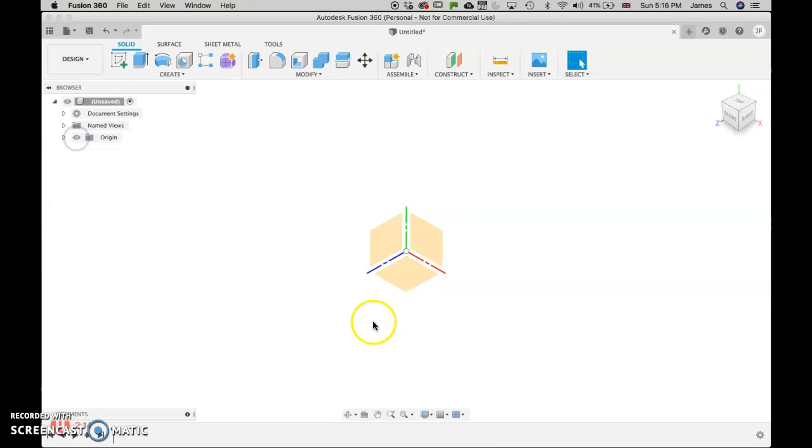So let's begin. The first thing I'm going to do is switch on the origins button here. So it's currently off because the eye is off. So if I switch it off again, come up here, switch on the eye, and that's on. And that allows us to see 3 different views. So this is the floor, as if we're looking down on an object. This is looking at one side, and this is looking at another side.

So if you think about it, if you want to look at the front, it's here. If you want to look at the right, it's here. If you want to look at the top, then there's the top here. So we're going to begin drawing on this surface. So what we're going to do is create a new sketch. And we're going to click this surface here, and it's now moved around. You can see we're looking from the top.

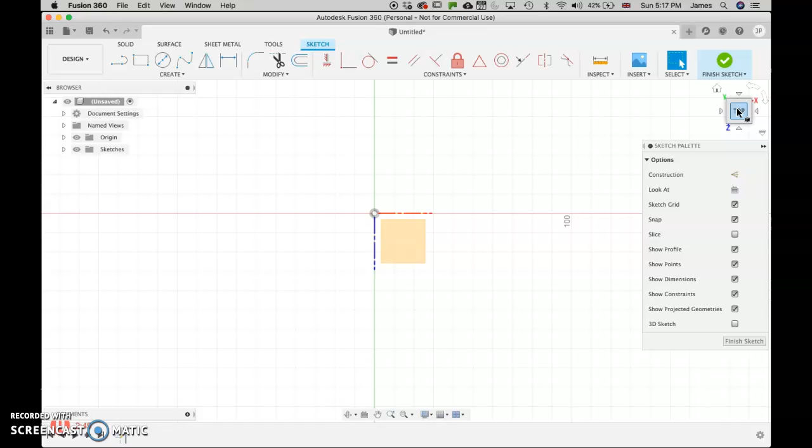I'm just going to click Finish Sketch, and I'm going to come down and right-click down here. It's not letting me right-click. Try that again. No, I can't right-click. I think maybe the screen recorder software is on top. Let's try it now. Yes, I can right-click now. Now I'm going to click Delete to get rid of that sketch because I didn't need it.

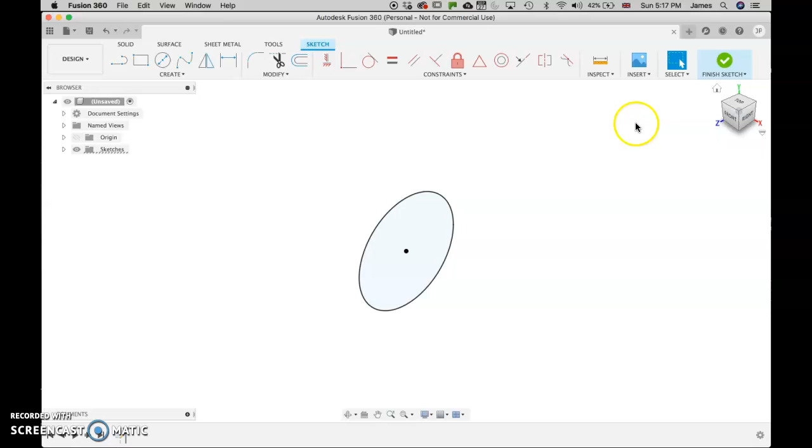So I'm going to show you what I've seen people sometimes do wrong. If their origins are off, they get a little bit lost, and they start creating, and they've clicked here, and then when they've drawn their cup, and don't worry, I'll talk you through all these steps in a second, they've accidentally drawn it on the side, like that. So the cup's laying on its side, rather than being in the direction that we want it.

So I'm just going to go back and get rid of all those by just deleting these out. So you can see how easy it is just to click at the bottom and delete out the things we don't want.

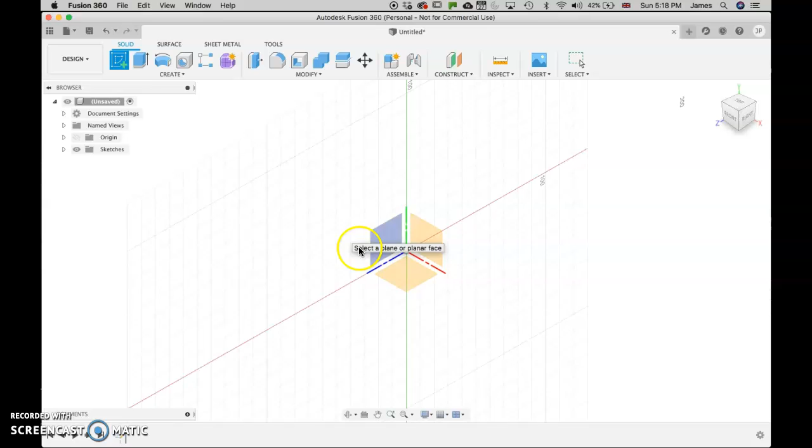So now let's start with what we do want. So what I need you to do is to click up the top here, the Create Sketch icon, and make sure you get the floor one, not either of the sides, but the floor here. So you click on the floor, and it's going to spin round, and we can check we're looking down from the top. Great.

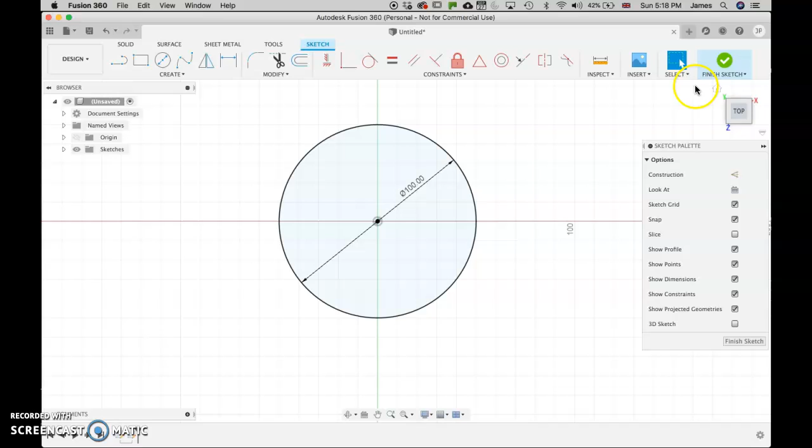Now if I want a circle, I can click here. I could even come and click here, or I could just click the C button on the keyboard, and that makes a circle for me. So I go right to the middle, it's going to snap to the middle, and I want to make this 100. So now, if I click Finish Sketch, if yours doesn't spin round, just click the home icon and that makes it spin round.

Now I want to pull that up. I want to stretch that out to make it the beginnings of the cup shape. So I could click Extrude, or I could click Press Pull, it does the same thing, or E on my keyboard and I get that extrude. So if I just show that again, cancel that, I can click here and then click on it.

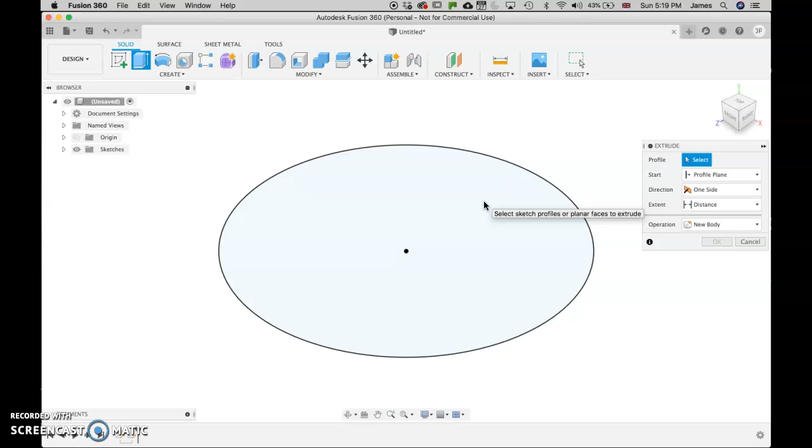I've already got it selected. If you haven't got it selected, or you've got something else selected, it might not get it automatically. If it hasn't, you just click on it and there we go. Click on it and select the area we want like that. So I can either pull up and it makes my shape, or I can type, so I'm going to type 100.

Now I'm going to come down here and I'm going to click fit. Now I can see everything. So I've got the sort of basic shape, so I can look at that from a few different views. I could look at that from underneath. Now I want to go home, so I can see it from home.

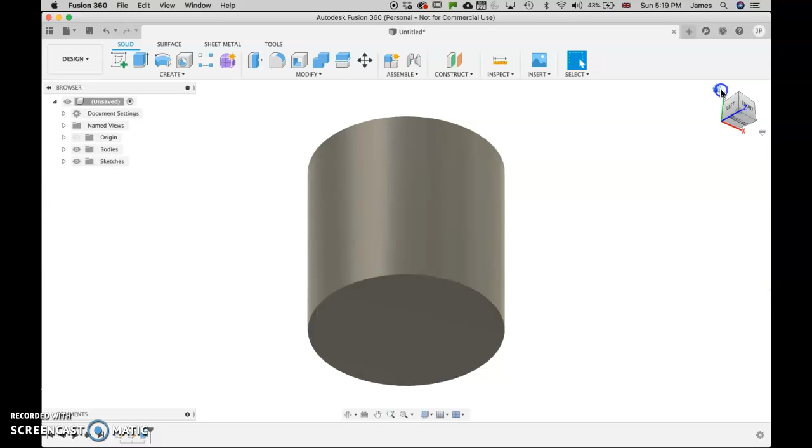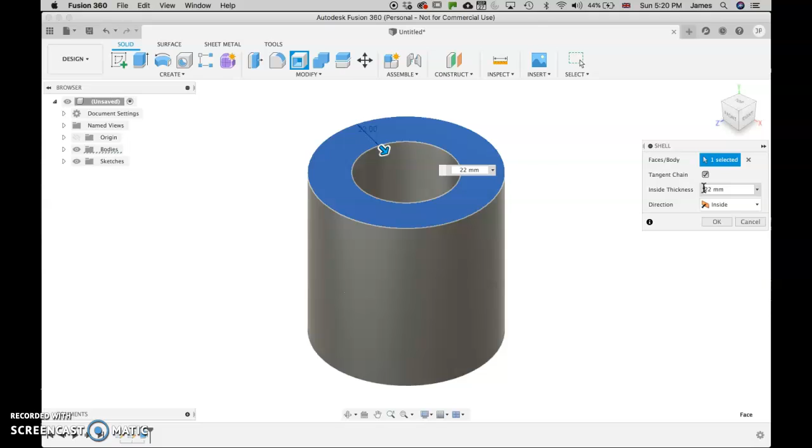Now I want to hollow this out, so I'm going to come up to modify and click on the shell icon. So I'll show you two different ways, and you can click here and you just tell it how wide you would like that wall to be. So if I change that out, there are various different sizes that could be. So I want mine to be, let's say 5, and that's now made that hollow at 5.

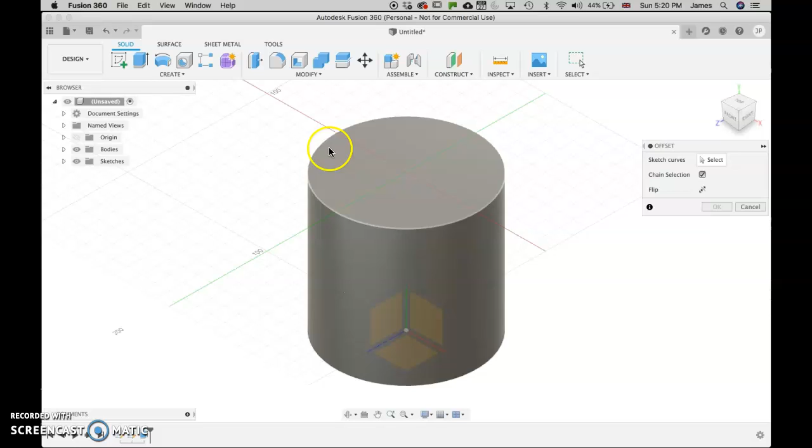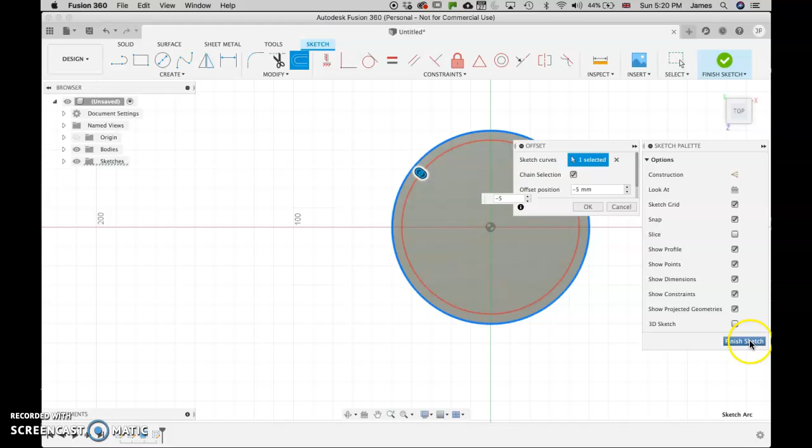I'll show you one more way of doing that. I'm just going to delete this feature. Another way of doing that is if you click O, the letter O for offset, and you click the top, then you click that edge, you can now pull in, so if I do that as 5 again, but I need to do -5 because you can see here it's made the offset go to the outside, but I want it to come to the inside, so -5.

If I click finish sketch, I can select this area or that area, and I want to get rid of this area. So E for extrude, select the area I want, and pull it down. Now with this one, unlike the last one, we can control the height we want it to be. So if we remember, we made it 100 tall, so let's come down to 95. It's not going to do that automatically, so I just need to jump in here.

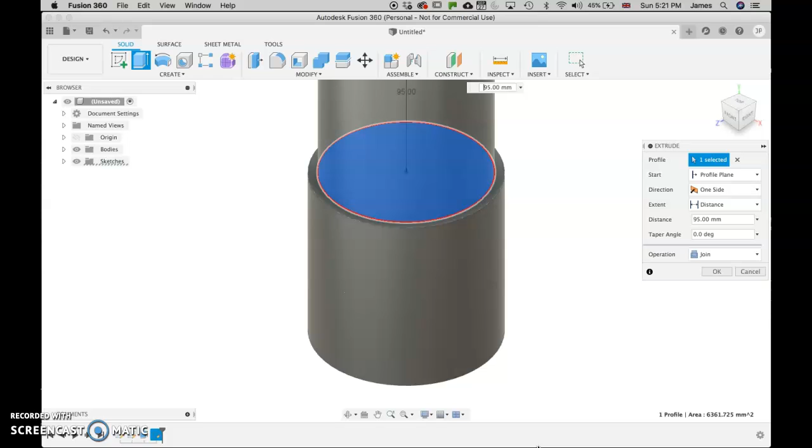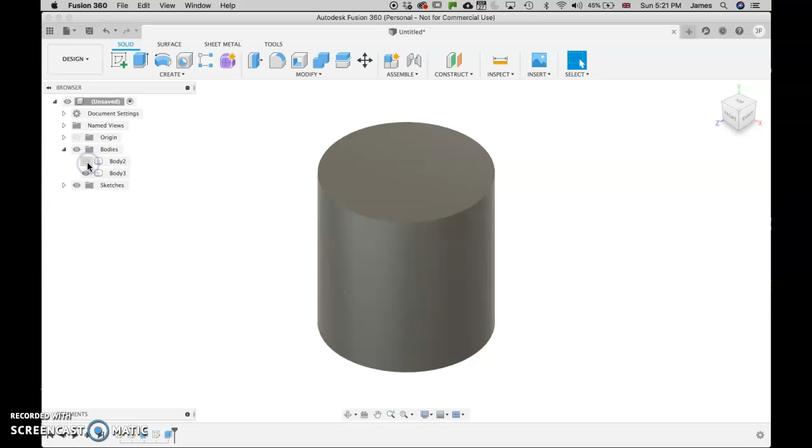And -95. If I haven't got the minus, it'll add material to the top, but I don't want it to do that. I want to do minus. So we've got -95 and a cut operation. Now I could do a new body, and that's now actually made a new part inside there. So if I just show you what we've done, if we come to bodies, let's click OK first. We've now actually got two bodies. We've got the outer one and the inner one.

So see, it's made those two different ones, but I didn't want to do that. I wanted to cut. So I can come and I can right click here, edit feature, and I can click cut. So now we've cut down into the body. So the only things left to do is I need to make the handle, and we need to make the handle the right shape and then add some materials to it.

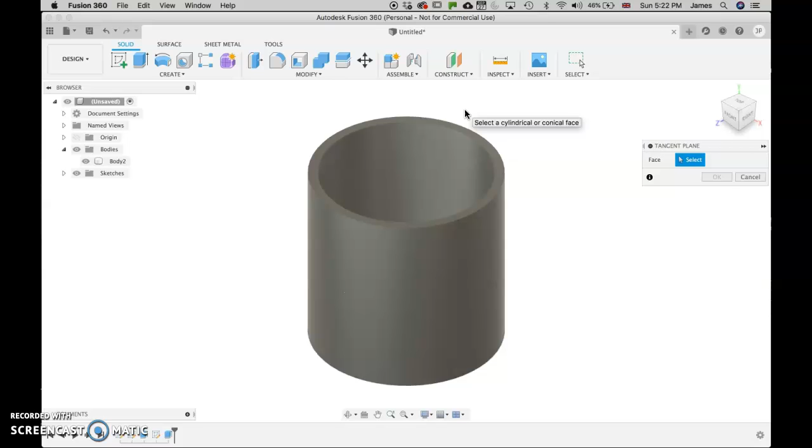So I need to come up to the top to construct and get what's called a tangent plane. Tangent just means next to. So if I switch on my origins again, I don't want any of those, they're not going to be in the right place. I want a plane around here. So I just click on the body and it's made this plane here. Beautiful. So now I add a sketch onto that plane, and I'm just going to draw a rectangle.

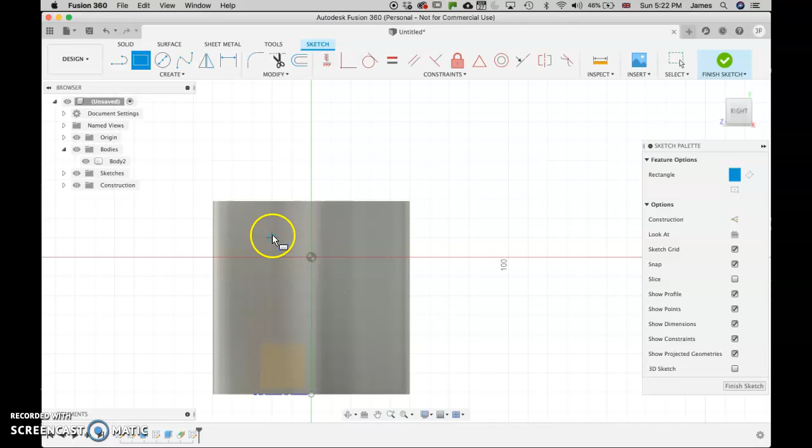It's going to be my handle. So if I draw that and click finish sketch, see we've got a rectangle here. E for extrude, and I'm going to pull that out.

How far should we go? 40, 50. We can look from the front. It's probably a bit big, isn't it? Let's make that 40, shall we? Yep, that's looking better for the handle.

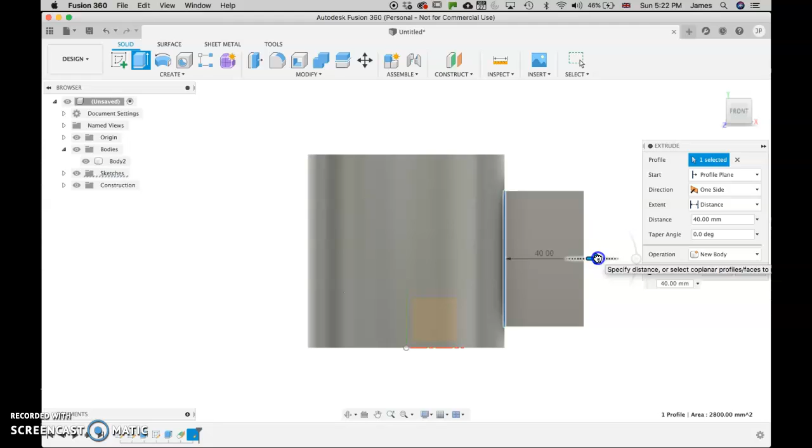I click OK. Now it's a bit of a lumpy, ugly handle there. So if I click the fillet tool, come to the top, fillet, or I could click F, either of those, I can then click that edge. If we just go to the front to see what we're doing, we can pull that down.

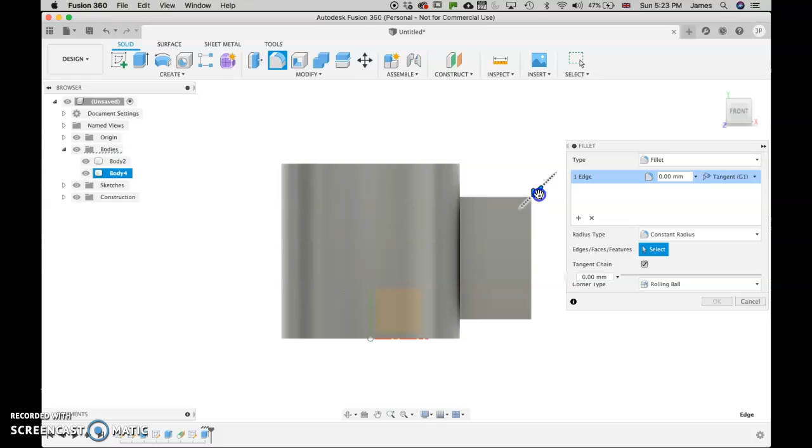We get that shape, and obviously that's not the right shape. I've exaggerated what we're doing there, so let's bring that back up. Shall we maybe go 40? Let's see if that works for us.

In fact, what I'm going to do is cancel that, and select this edge, press Shift and select the bottom edge. Click front, and we've got these two sides connected.

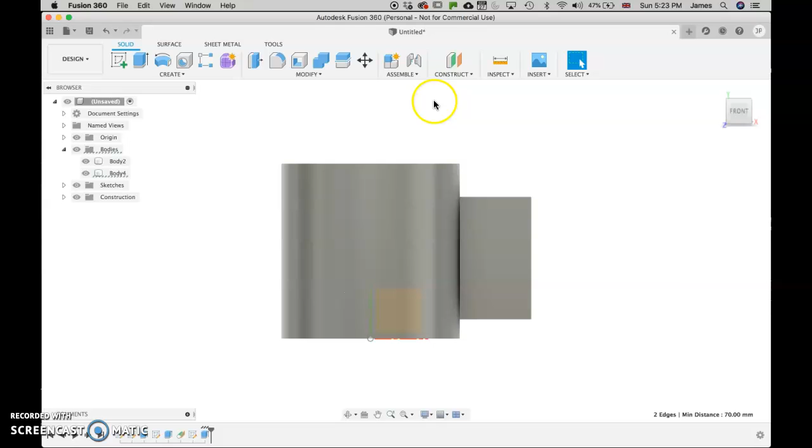So now if I click fillet, this one, I've got the bottom one selected. I just can't, yeah, I've got them both selected. So now if I do 50, sorry, it's actually clicking this button.

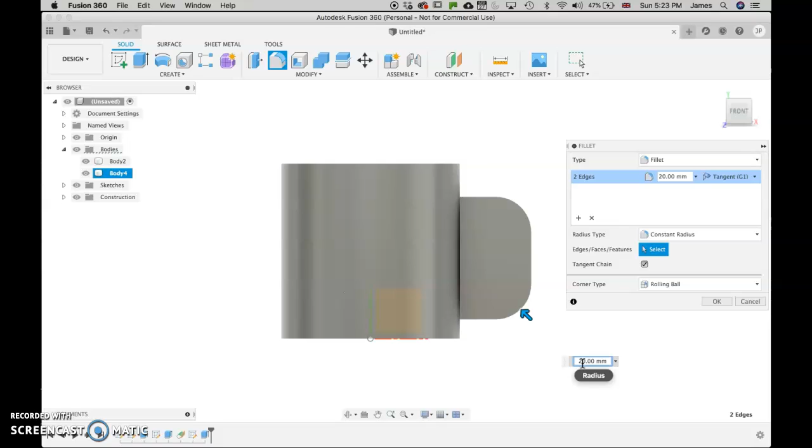So let's try 20. That's okay, but I think we can go more, can't we? More than that, yeah. So let's try 50. That was too much. 40, how does it look with 40? Too much. 30. 30 is about right, that's pretty good. So I click OK.

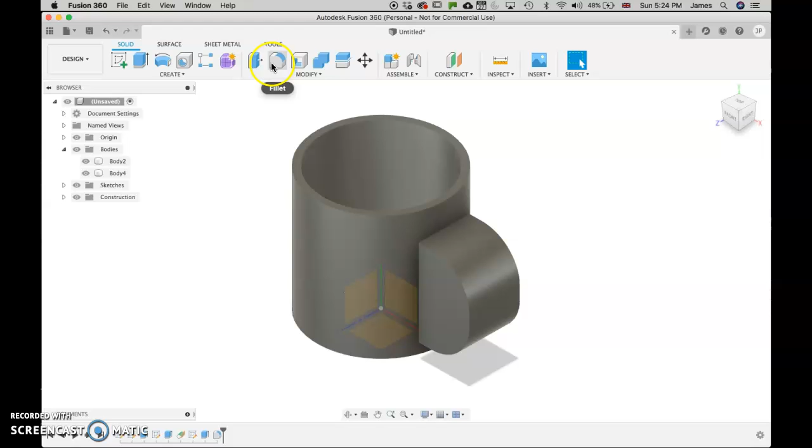So now we've got the curve of the handle, but we need to put a hole in the middle of that. So what I'm going to do is come down here, create sketch, click on this plane, and I want to make my handle in here.

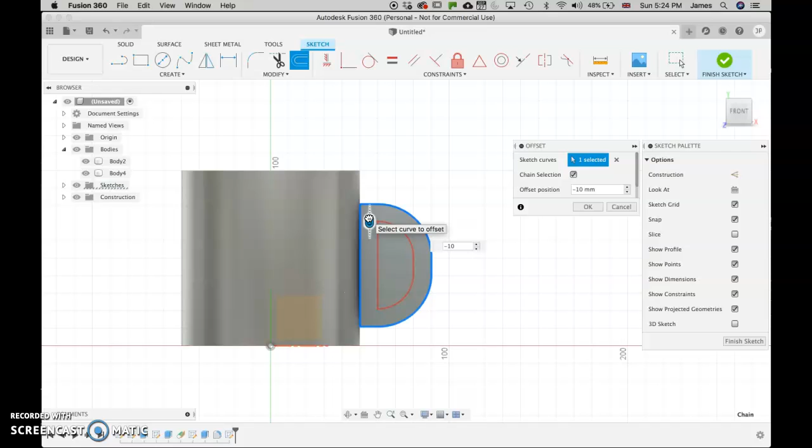So I'm going to click offset again, click on this edge, and just pull in. Let's make that, let's try 10. Minus 10. There should have been to come inside. Yeah, minus 10, that's not bad. Let's click OK, finish sketch.

So now we've got a drawing here. You might be ahead of me. E for extrude. Get this. Pull through. So we've cut through.

Now we're getting close to the cup, aren't we? That's looking pretty good. But I want to round these edges up. So you might remember F, fillet. Get this edge, get this edge. And then just try out some numbers.

Let's try 20. It's telling me 20 is too much. Let's try 10. Yes, and we're getting that kind of curve coming on already.

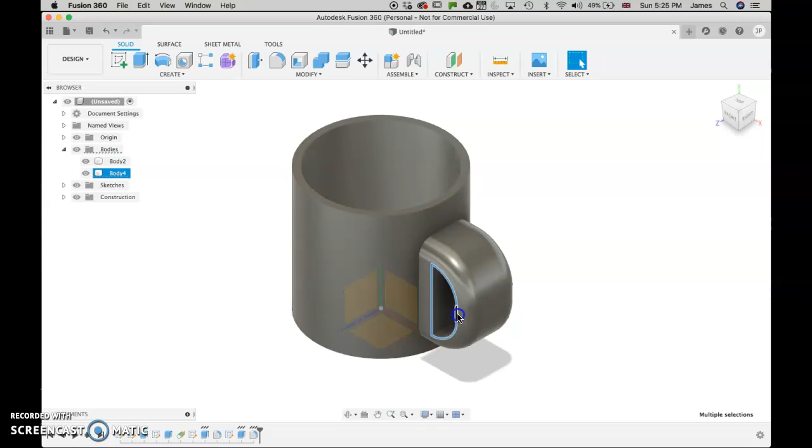Looks pretty good. So now let's come and get that one, and select these bits here. Did it get that bit? Get that bit here. Maybe try 5.

So you can see it's cut into there. So that was too much. Let's try 2. Yeah, 2's worked better there.

2's been acceptable. I can spin round by clicking on the other side of the view cube, and I can click these. I think we can remember that 2. So fillet 2.

So it's not liking this for some reason. I'm not sure why. Let's click cancel. Let's solve that. I think it's because I didn't get all of them, maybe.

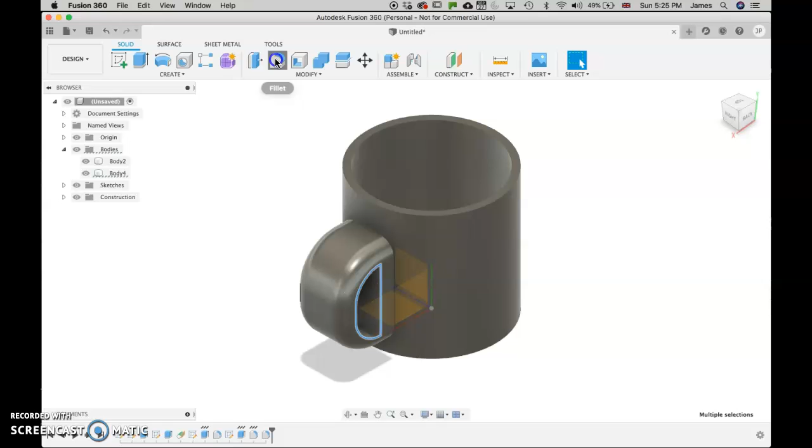And it's not. Okay, now let's try 2. Yes, that's worked this time. So it's got those. Perfect. I think I might even do it at the top. So fillet 2. Yes, now we're pretty much there, aren't we?

I'll turn off the origins so we can see it. The only thing left to do is to give it some appearance. So if we click A, we can choose the material, A for appearance. And now I can just come down here and choose what I'd like it to be made from. Let's scroll up and take a look at the materials we can use.

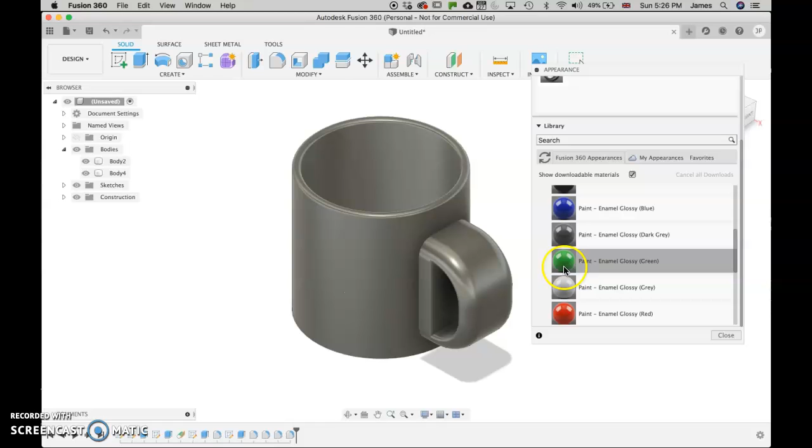So if we choose paint, glossy, we could choose a colour, so why don't we make it green, like that. So now we've got a beautiful green mug, or we could choose a material, like glass, and let's make it out of blue glass, shall we? And you can see with the glass, you can actually see through it.

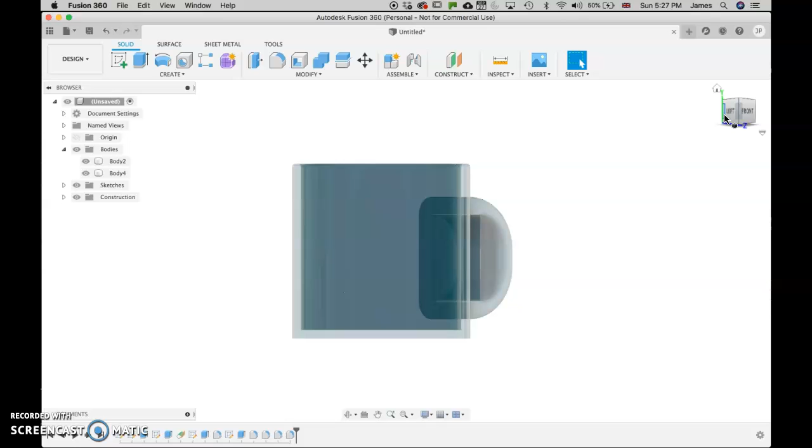So looking at that from a few different views, just by playing with the view cube, spin it around and see. That's the power of Fusion. It's so easy to draw exciting and interesting objects. Final thing would be to save that up there, and then we're done.